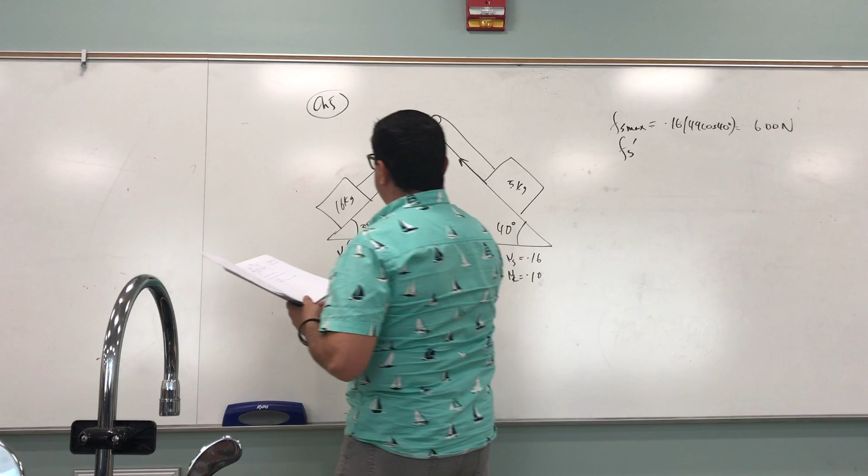And Fs prime max, these ones we call prime on this side. That's equal to 0.45 times the weight of that, we made it heavy, so 16 times 9.8, 156.8, cosine of 35. 57.8.

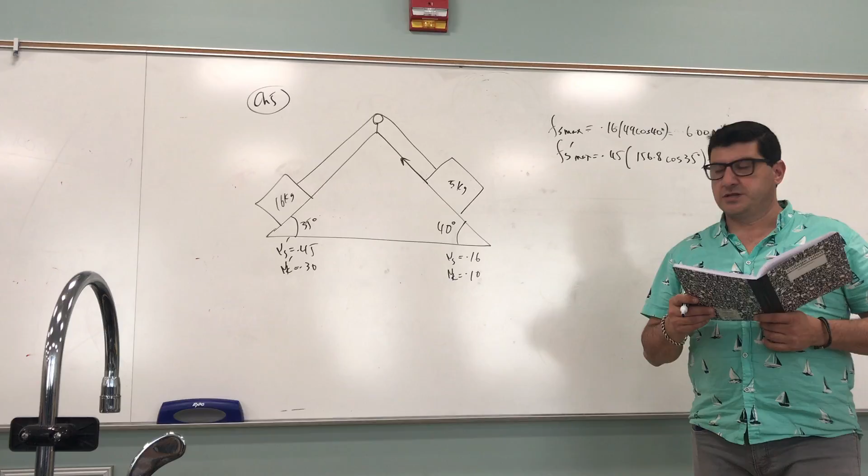I think at the end I said it wrong. I said the system will move. Right, we adjusted something because it wasn't moving and we redid it again. At first I had 6 kilograms, then changed it to 16, but it still doesn't move. I was wrong. I said it will move because the sum of these two forces is 63.8, right? On my notes, it said 58.45. No, that's the difference. I'm sorry. Yeah, sorry.

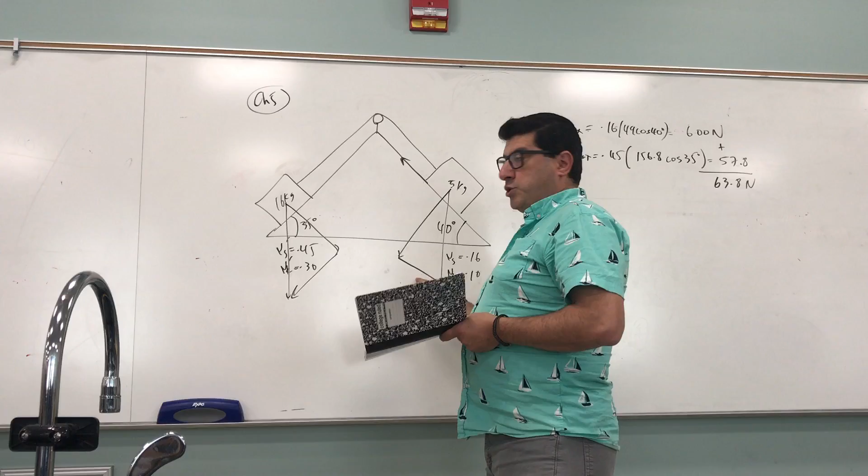So remember, you break these weights into their components, because they're competing against each other. So this guy is the downward component of the weight of this. That one is 49 sine of 40, which is 31.49. And then this one is 156.8 sine of 35.

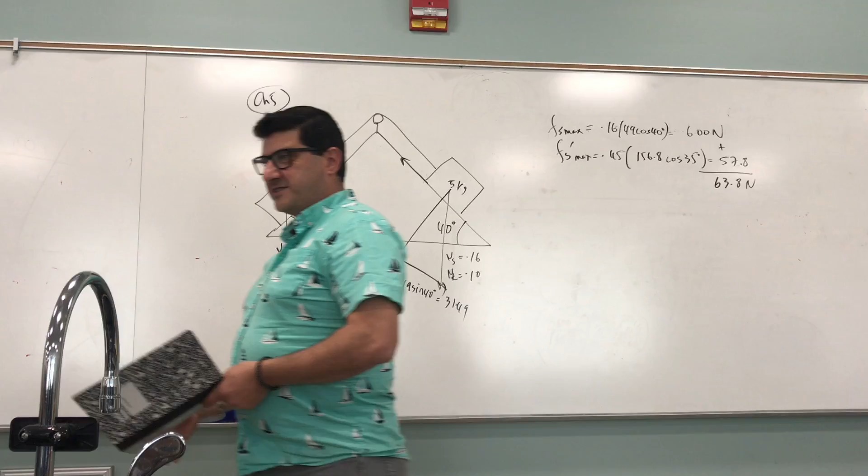Now in your notes, who gave me this? It's not complete. You're not showing how you got the 89 and the 31. No good. So that's a half. 1.5 out of 6. I have notes, but not complete. So you got to show how you're getting the downward component of the weight of each.

This one comes out to be what? 89.94. Okay, now if I subtract that, 89.94 minus 31.49, see, it still will not move. This becomes 58.

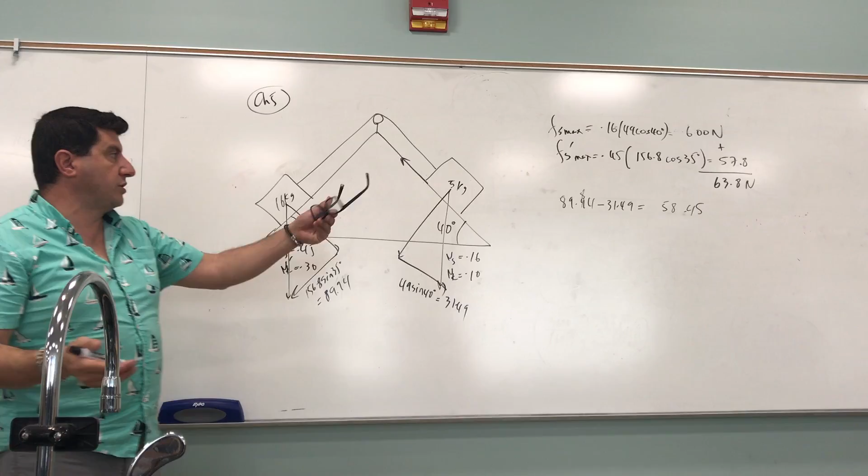So what's happening here is that the reason the system can move, if it ever will, is that their weights are fighting against each other. If there's no friction, of course the system will move. We don't even have to do all of this. But friction here will oppose that motion, and friction here will oppose it. Oh, this friction is downhill, right? It's going down. So this friction at maximum can be 6 newtons.

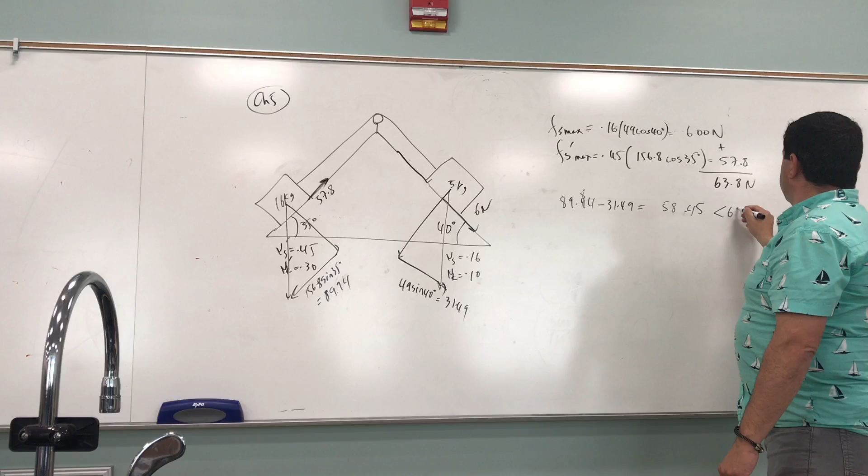And this friction can be 57.8. So together they can exert a total of 63 newtons. That's more than the difference of these two weights, right? 58 is less than 63. So the system doesn't move. I don't know if that's a happy face or a sad face.

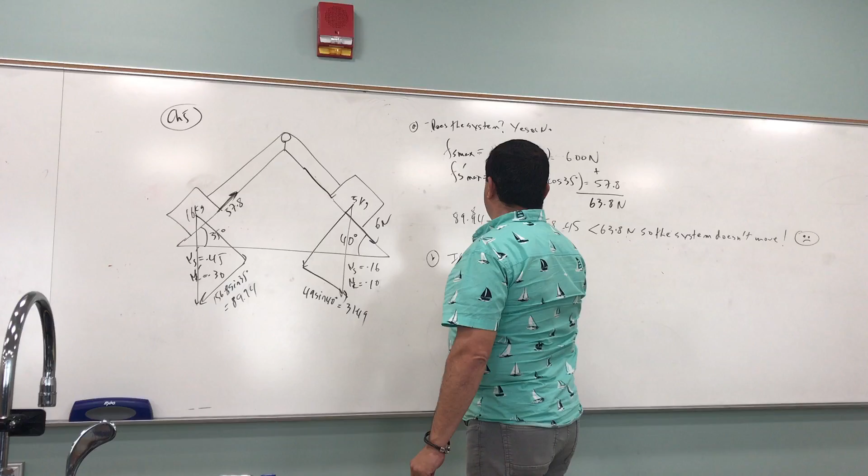Okay, so if it doesn't move, can we find out what the friction force on each one is individually? So the question can say, A, does the system move? Yes or no? And once you determine that, B can say, if no, what is the friction force on each block? And if yes, what is the acceleration of the system?

Right? So in our case, we know it's a no. So the answer is a no, right? So what is the friction force on each block? Set up the equation. Huh? It'd just be the force going down each. In other words, the friction here, this one's 6 newtons, it seems like that one probably reaches its max earlier than this guy does, right?

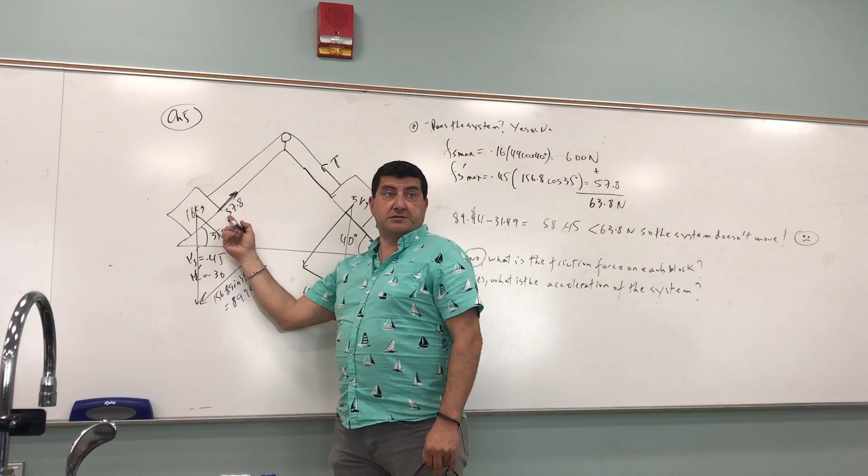So, in other words, just simply by equations, you have the tension in the string. So you have T is equal to 6 plus this guy, right? So let's assume this one reaches its maximum, this friction. Assume it. I believe it will, because 6 newtons, it will reach it. This one will reach its maximum before this one ever does, right? So then what's going to happen is T plus 6 is equal to what?

Sorry, it's not T plus 6. It's T is equal to what? 6 plus. So these kind of problems are really good. It's all visual, you see. You can see one force is up, so that one has to equal this plus this. Both of these are trying to drag the system down the incline, right? So it's 6 plus 31.49. And then T is equal to 37.49 newtons.

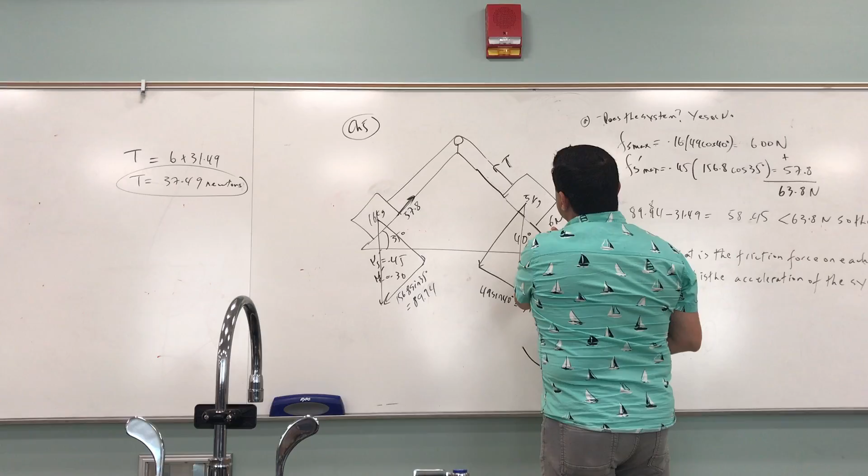So in other words, as soon as you put this block here and you connect it with a string, this block wants to go downhill. This guy is trying to make this one go up, and then the friction goes up to 6 and says, I give up already. I can't be larger than 6, right? And then the friction here says, I'll come and help you, because this friction is weak, you see? So now what's this friction gonna equal? Fs prime, we can call it. It's not gonna equal its max, because it doesn't need to.

So you say T plus Fs prime is equal to down, right? So this plus this equals this. Very visual, just look at it visually. T plus this equals 89.74. So the T that you got, you put it here. Then you subtract this minus this, right? And if that's less than its maximum, which is 57, that's another way of showing that the system doesn't move, right? So 37 you subtract from this.

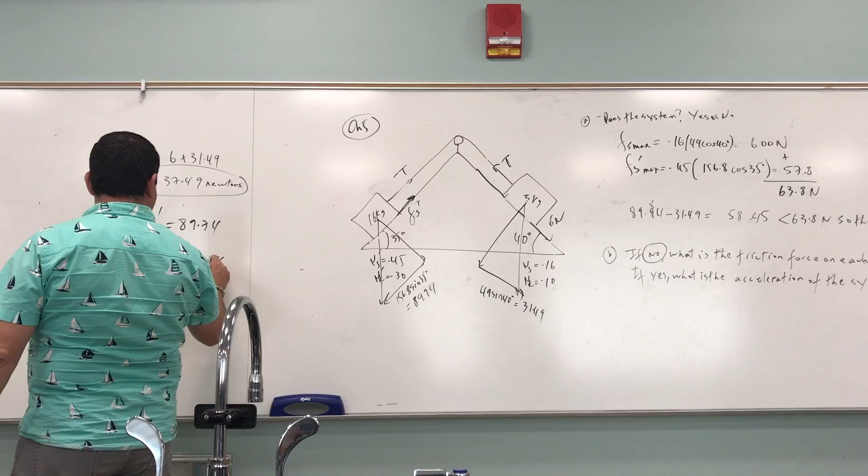Where do you get the 89.7? The 89, this guy, the weight of this. You're gonna have 94? 89 point, what was it? 94? Yeah, I did that on purpose. My handwriting wasn't good, and so I read my handwriting wrong. Do you guys ever do that? Exactly. I'm just trying to model what you guys do. It's always on purpose.

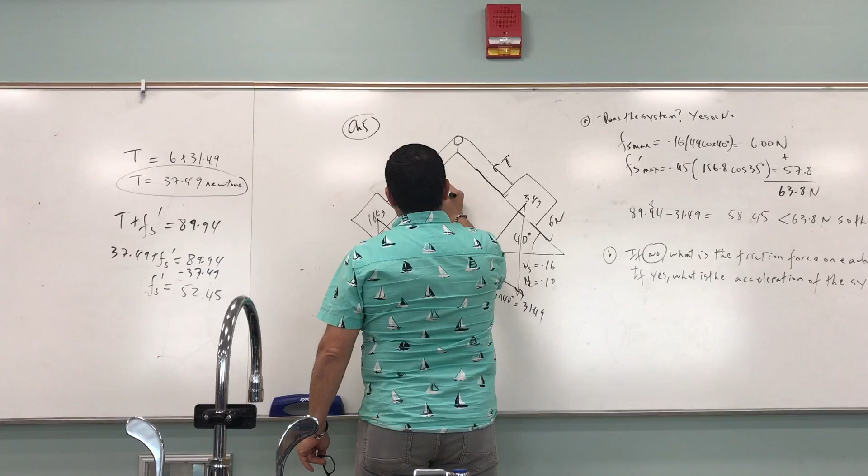Okay, so you have 15, 8, 4, 2, is that 2? Yes, and then 5. Okay, is that good? So in other words, the friction here only has to equal 52 newtons in order to prevent this guy from moving and also help the other one not to move, right? So can it be 52? Yeah, because we found out that it can be as much as 57. So it can be 52. This only tells you the maximum possible that static friction can be. So now this proves to you that the system doesn't move for sure.

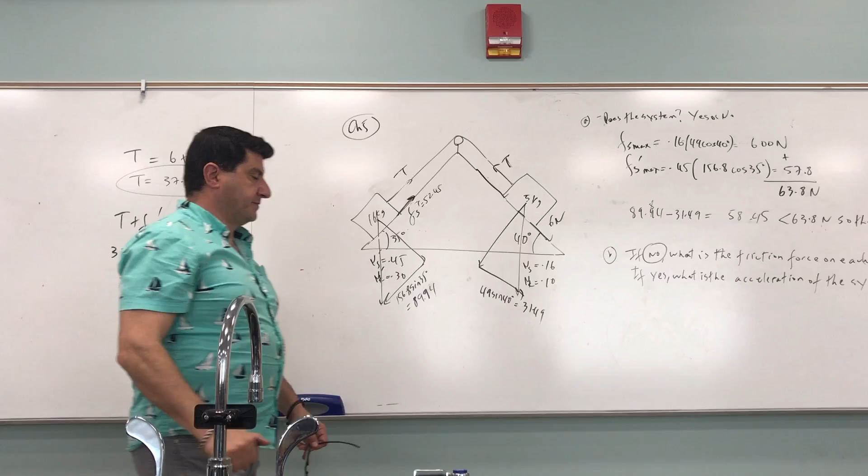Fs prime is 52, Fs is 6, and the tension, in case the problem asks about the tension, is 37. Question. Yes. So if you were to use big M and little m, could you find an inequality of the masses for when the system would move or not? A general inequality? Yeah, of course. The big M and little m? Yeah. Yep. See, this one not only is light, but it also has very little friction.

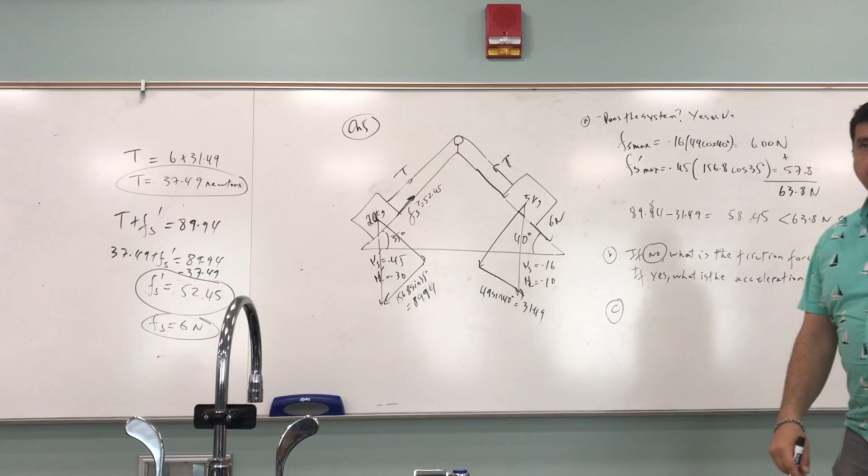Okay. Now part C. What if I add 4 more kilograms here on the left side? You think the system is going to move? Maybe. I think so, yeah, because this barely moved. Yeah, I'm pretty sure it will move. So if the 16 kilogram changes to 20 kilogram, what is the acceleration of the system and the tension in the string? Okay? So now redo it. See if you can get it started. I made the 16 into 20.

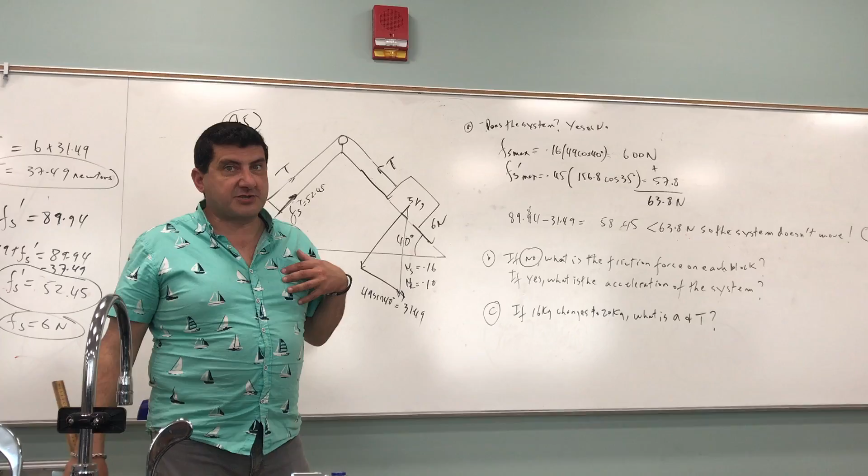Well, before finding out, before getting the A and the T, you have to first prove that the system is gonna move, right? I mean, just because I said so doesn't mean it will. So how would you check? You have to do exactly what we did all over again, right?

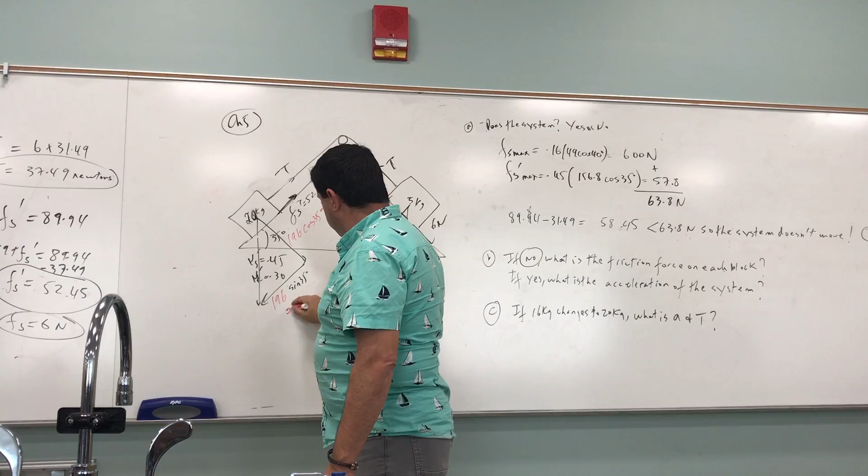So how would you check if the system does move? Well, recalculate the weight of this, right? 20 times 9.8, that's gonna be 196. And then this is gonna be 196 cosine 35. So redo this thing, right? Redo this thing. 196 sine 35, 196 cos 35, right?

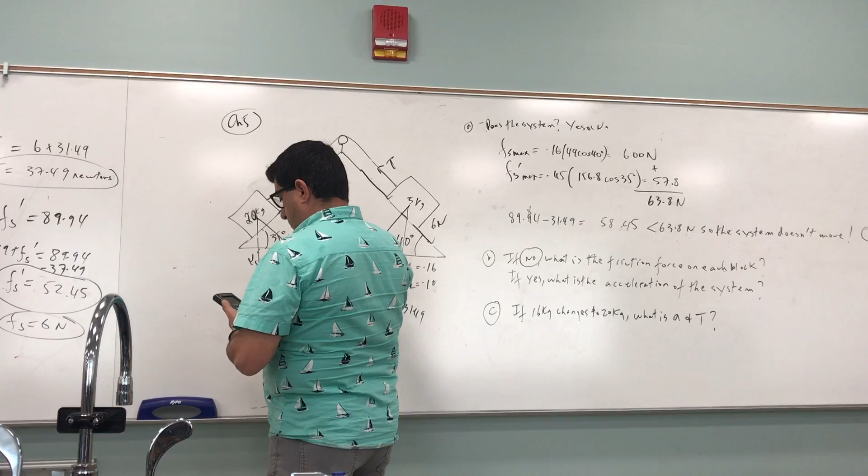So you do the 196 cos, 196 sine, then what do you do? You redo this guy, right? Fs max. This one stays the same, but this one changes to 196 cos. So you try to figure out what the maximum friction, static friction is, right? Under 20 kilograms. So 196. That's Fs max, not F prime.

Which one? Isn't that for the right side? Which one? This one? Yeah. 6 newtons? Yeah, that one doesn't change. Yeah, that's what I'm saying. But you have to figure this one out. That one out, yeah. Yeah, exactly. I thought you were doing the other one.

So this one is gonna be the 160, right? 0.55 times 0.45. So 72.25. So together 78.25. The two frictions together give you 78, right? Then you figure out this one is 112.42. 112.42 minus 31.49. So the difference of their weights.

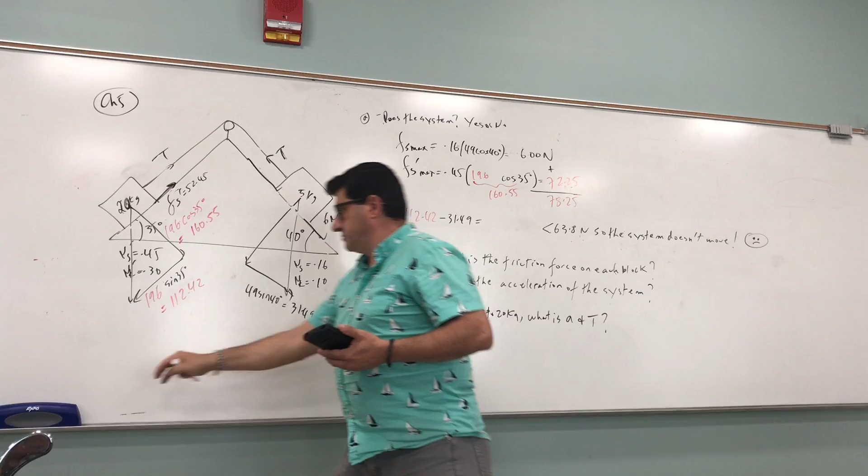Oh, barely. Huh? Right? So together, the two frictions can only exert 78 newtons of force, but the difference of their weights is 80. It will move. Right? So it's greater than 78.25. So the system moves. Yeah? You guys see the logic?

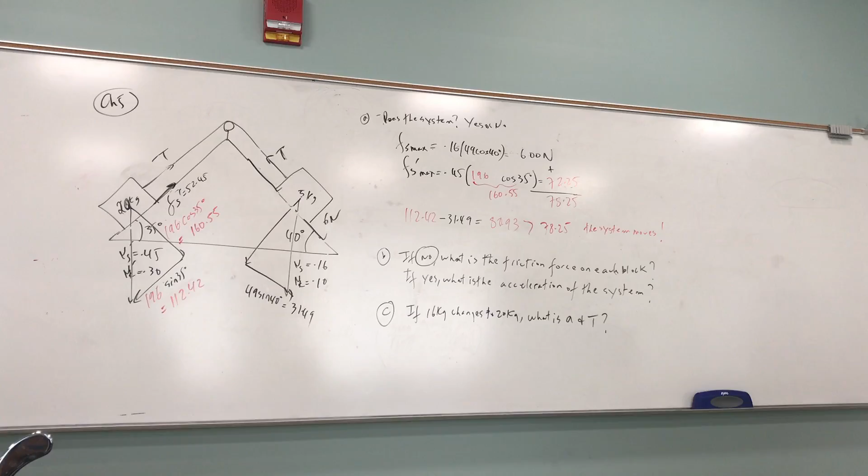If the two competing forces, you subtract, you get 80, but together the friction is 72, the maximum friction is 72, and then the maximum friction of this is 6. So together it can only give you 78 newtons of support. So system moves. See? So now if the system moves, what will happen? Which direction will it move? Well, then this guy will move down, this tension will be up, and then what's going to happen?

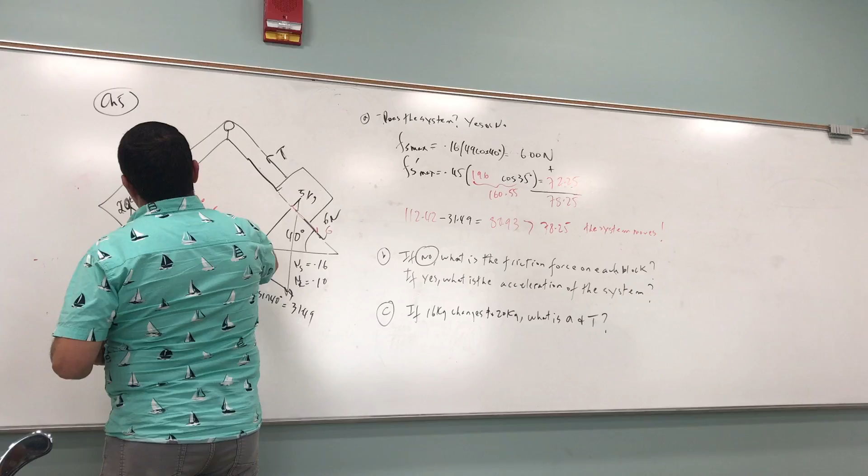The friction force reverts to kinetic friction, right? Once the system moves. So we change this to kinetic, which is mu k prime n prime. And then this friction also changes to kinetic, right? Mu k n. Okay? So now what happens? This guy accelerates down the incline, this guy accelerates up the incline. So now it's just going to be visual. Look at it visually.

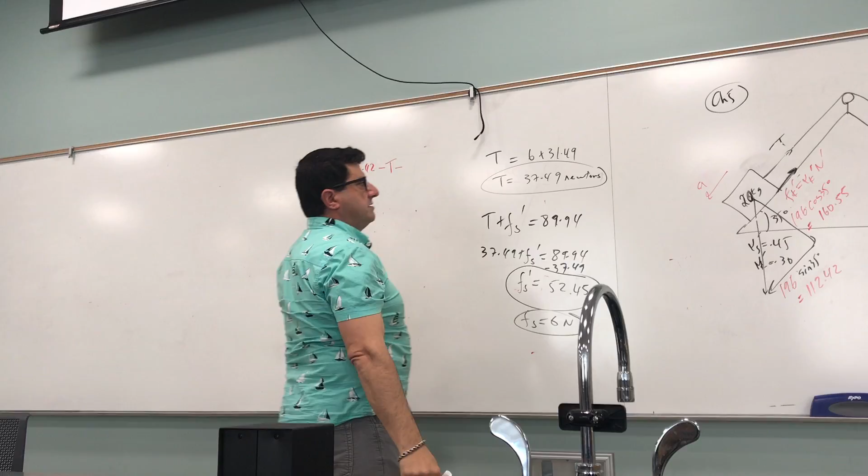112.42 minus what? Minus the tension, minus the friction, but kinetic friction now. So what is that? 0.3, right? 0.3 times the normal force, which is what? The normal force is going to be 160.55, right? Is equal to the mass of the block times its acceleration. So the downward force of the weight minus the tension minus the kinetic friction is equal to mass times acceleration, right?

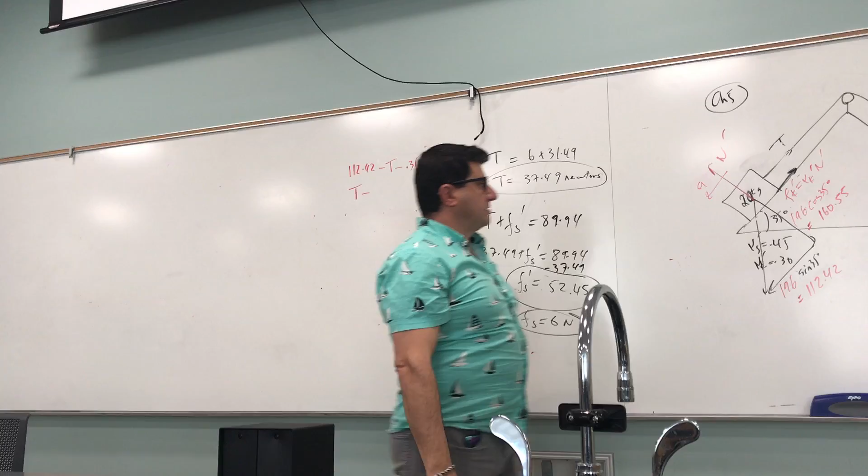And then for this one now, the tension wins because the net acceleration is up. So now you do T minus the downward weight, 31.49, minus the kinetic friction, which is mu k n. So the mu k is 0.10. Times the n of that is what? The n of that was 49 cos 40, right? 49 cos 40. Which one was what equal to? Well, let's just write it 49 cos 40. That's equal to what? 5a.

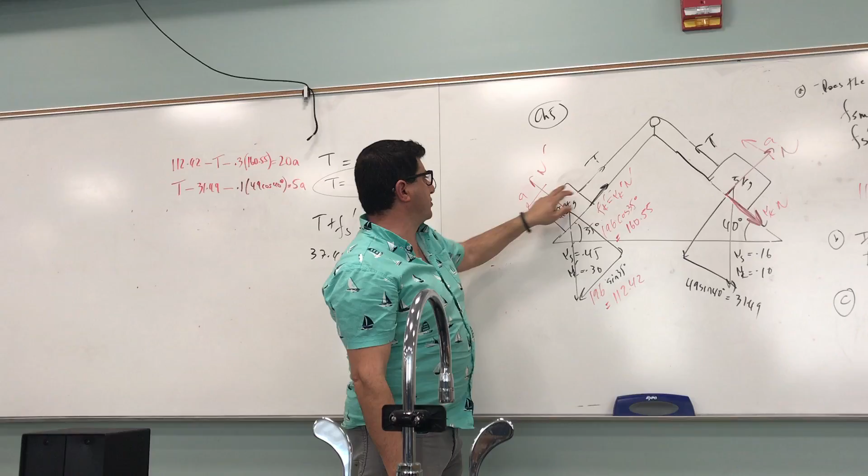So it's always the winning force minus the two losing forces. So this force is winning, and these two forces are competing against. So the winning force minus the two losing forces equals the mass times acceleration. Okay, so then you can add these two equations. When you add the left, make sure to add the right. Right, so then you have here 112.42. Negative T plus T cancels, and then you add the right side is 25a.

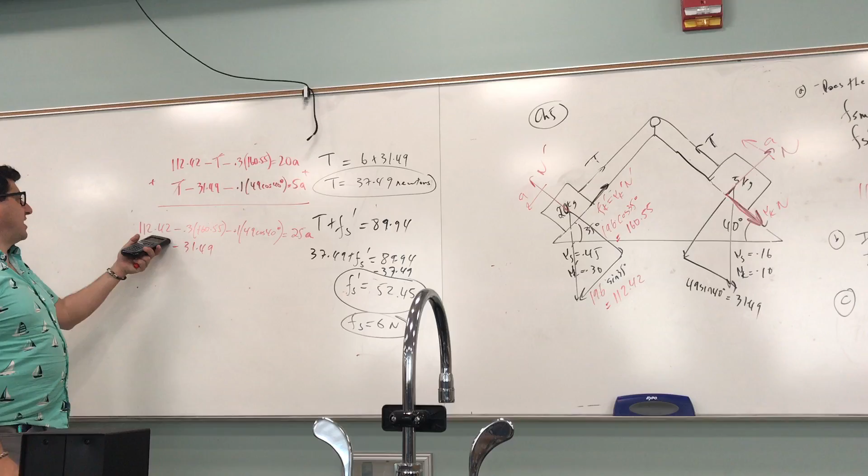Not the 31. Which one? The 31. Yeah, like where you added the equations, I mean. That's 31. Oh, that's the downward component of the weight. Did I forget that? On the bottom. Negative 31. Oh, you have three things to subtract, right? Again, I did it on purpose, because often students will forget that too. Right? Can't forget that. Now, the two competing forces, the weights, and then the two frictions.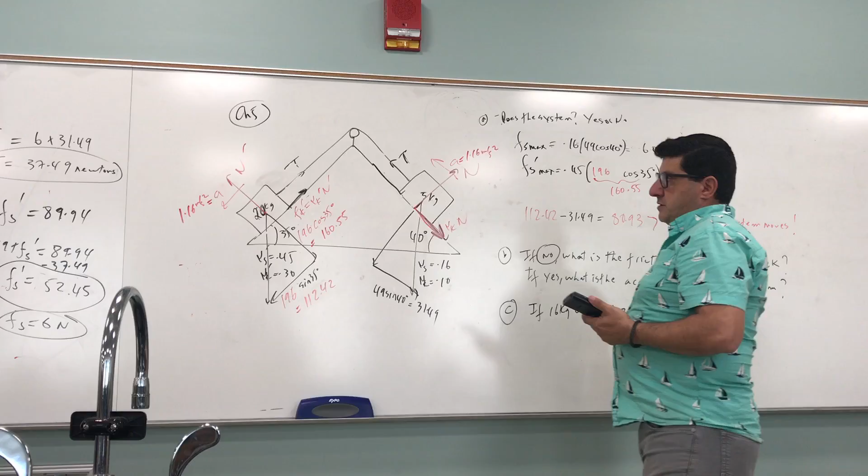So that means they both accelerate at that rate of 1.16 meters per second squared. And then once you get that, you can put it back into here to calculate the tension, right? Into either of these two equations. I can put it here, then add everything here to that side, and then calculate for the tension.

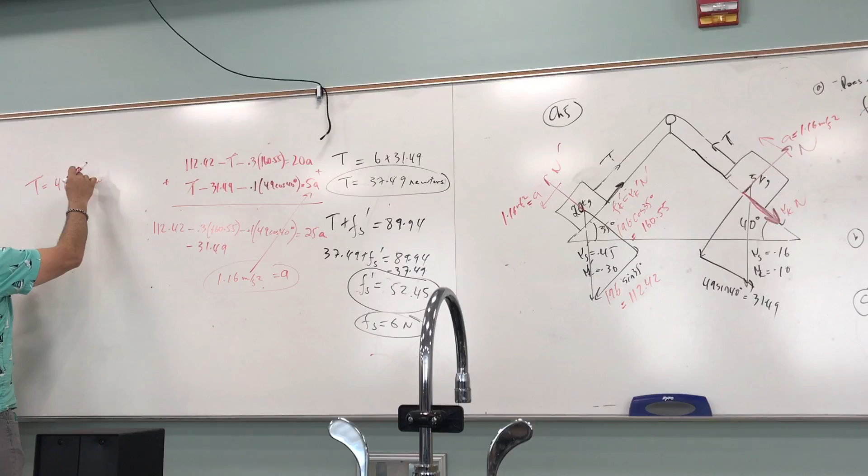What was the tension in the earlier case? 37 newtons, right? So when we added more weight, went from 16 to 20, the tension in the string should get tighter, right? Yeah, that makes sense. When it was 16 kilograms, it was 37 newtons of tension.

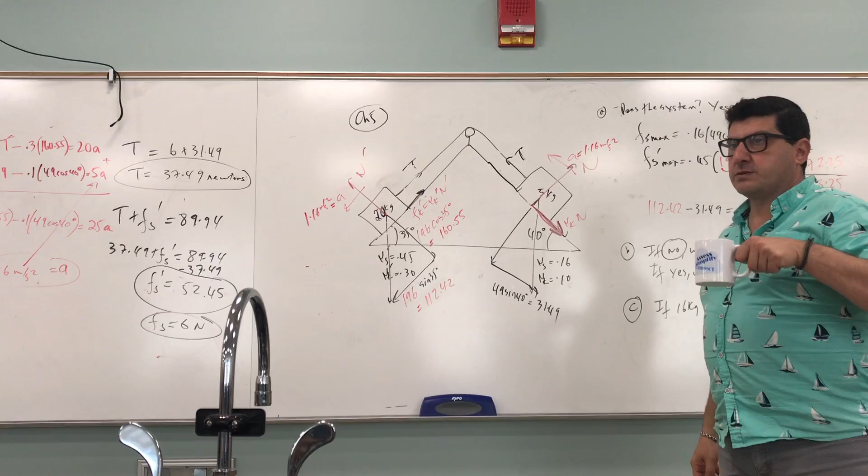Tension is sort of the measure of the stretching of the string, how much you're stretching it, right? Okay, look at that again, review that. I'll give you a minute or so. Review it, make sure you can understand.

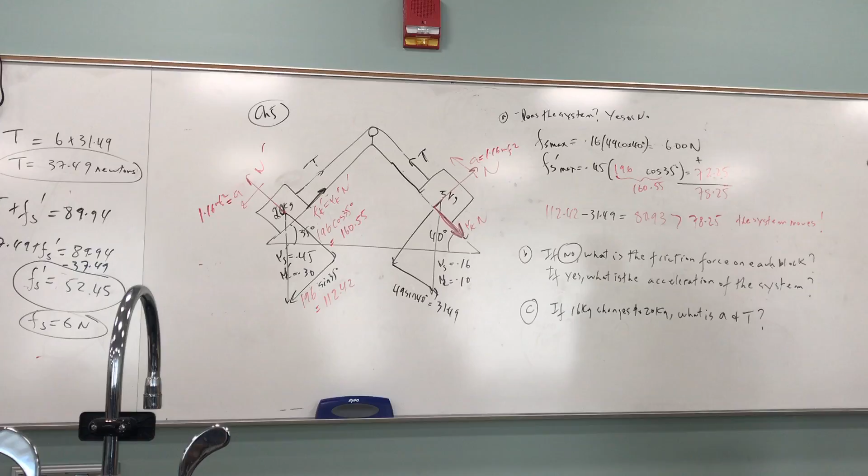You're understanding? Look at that, look at everything.

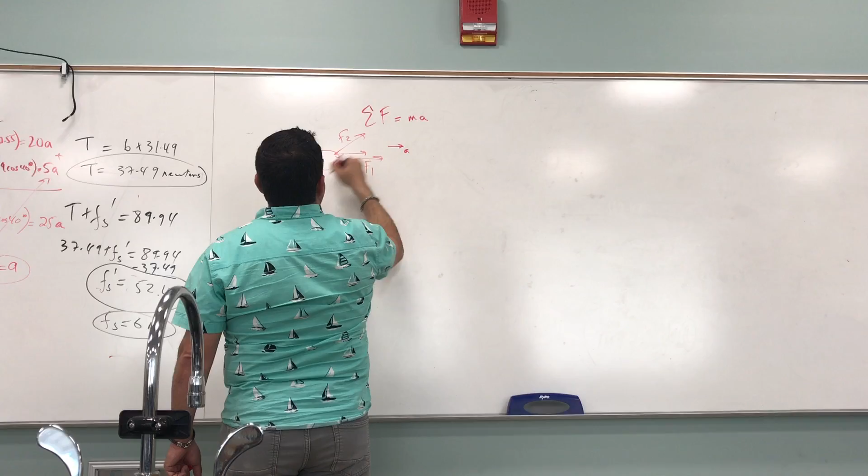Let's say we know that it's accelerating that way. Then we do this force plus that force, component of that force, minus this force. So F1 plus F2 cos theta minus F3 is equal to MA. Winning forces minus losing forces. I get the math on it.

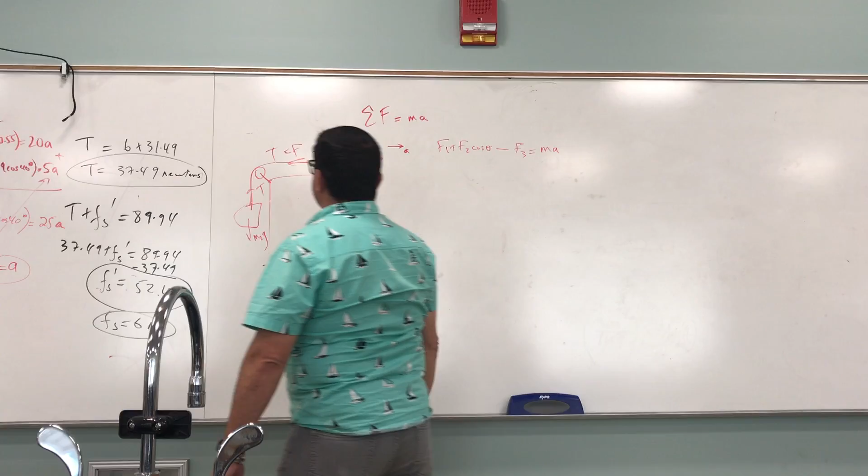And then if there's a string here with a pulley, right? Then what happens? F3 becomes the tension in the string. And then you have tension. Then you have the weight of this guy. So if this is accelerating this way, these two are beating the tension, right? And let's call this M1A.

And then which direction is this accelerating? If that's accelerating to the right, this guy's accelerating up, right? So then tension is beating this guy. So T minus M2G is M2A. Then you add these two. There's your possible test question.

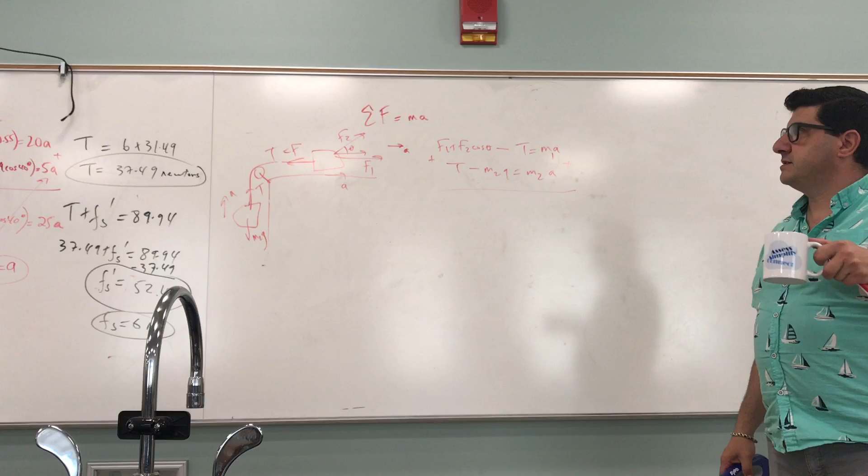I'm just used to working out on force tables, not like with the shorthand. I've never seen it written that way, almost like it's a variable. I mean, I get it, it's just when I was writing it down right now, it confused me for a second. I was like, wait, what is that? Almost as if A is a variable. Yeah, it is, it's an unknown variable. I'm just used to seeing it in a force table, separated, not just in a straight equation like this. But I get it though.

Okay, how about this one?

This is kind of like that block problem we had before, with the block and a pulley and another block, but one is just hanging there, freely hanging. I say, wait a minute, if it's freely hanging, isn't it gonna fall, right?

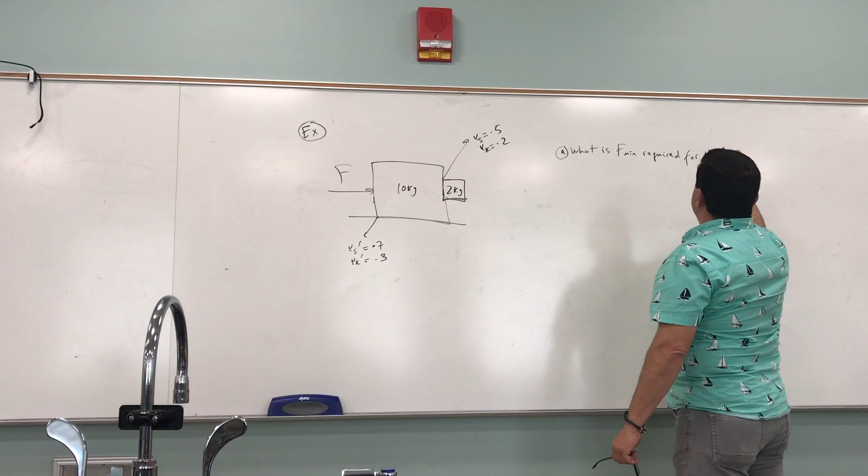Yeah, it will fall, but I'm gonna ask a question. What is F minimum required to make it not fall, for the 2 kilogram block? What is the F minimum? The minimum force required that you should push this one with, so that the 2 kilogram block stays stationary.

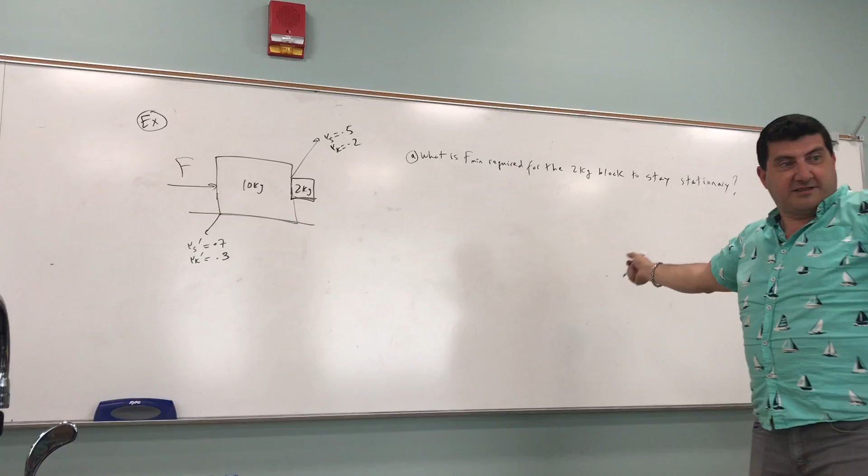Can you do that? Can you possibly push the 10 kilogram with enough force? And the answer is yes. It's almost like Spider-Man in the movie where he's in front of the train and the train is pushing him, but he had the webs, threw them at the buildings, and stopped the train, right? This is Spider-Man, which one was that? The second one, with the spider webs and buildings. Right, he stopped it before it went over the track.

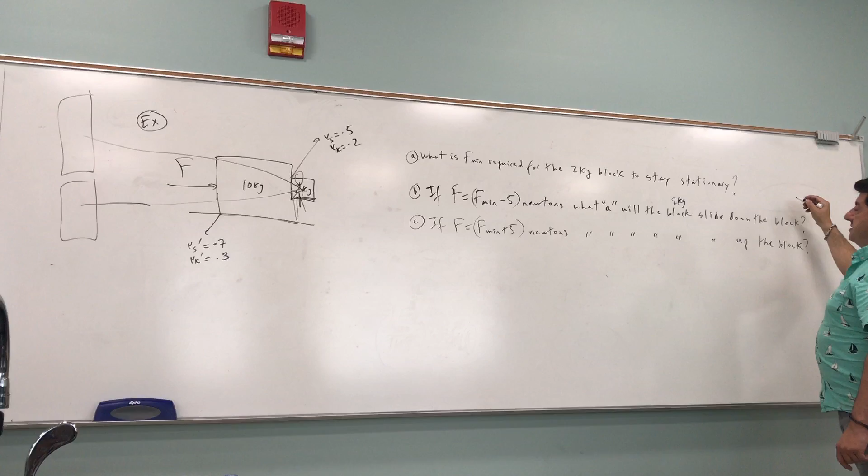So if F equals 5 newtons less, if you exert 5 newtons less force than that, what acceleration will the block slide down the block? That would be the 2 kilogram block sliding down the 10 kilogram block. Okay? And then the same way for the other one. So how do we find this minimum force required?

So, of course, I have to exert enough force to beat the static friction, right? So it has to be moving. That means we don't even need to know the static coefficient of friction. It's just extra information. So this guy is gonna be F, then you're gonna have mu K prime N prime, then you're gonna have N prime, then you're gonna have the weight, which is 10 times 9.8, which is 98, right? Then you're gonna have here the 2 kilogram.

Now let's focus a little bit on the forces on the 2 kilogram. What's happening to the 2 kilogram? There's a force pushing that. Remember the internal force between the blocks? We called it P before, for the other problem. We'll call it P again now. Then there is a friction force up, right? Preventing it from sliding down. So what's the friction force?

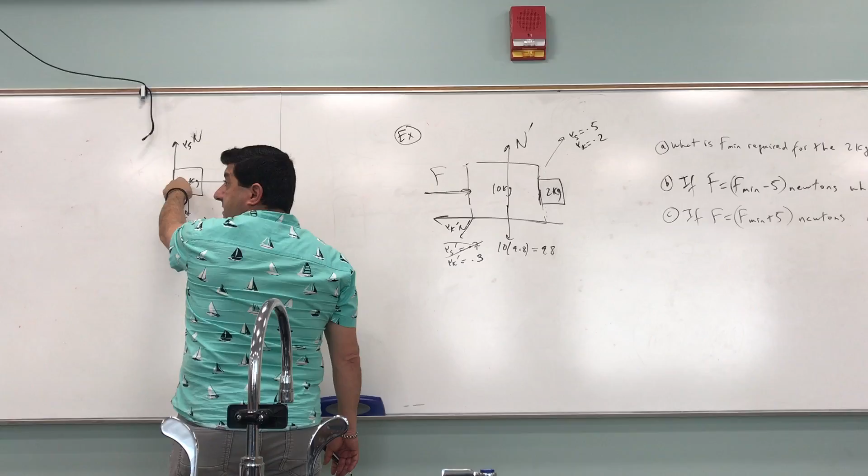No, that's it, right? Doesn't it exert a force on the... Yeah, so now we need to go back. So now we need to say, okay, if those are all the forces on the 2 kilogram, does this have any Newton's third law action-reaction? What are the forces on the 10 kilogram due to this? Well, this guy is pushing this one this way, and so this guy has to push this guy back with N. Always, every force has to have a reaction. So there's an N here.

Then there's a mu K prime N prime, which is this of N prime. But then there's another one that's kind of hard to catch. The friction force on this guy due to the 10 kilogram, right? So this guy is exerting a force on this guy this way, mu S N. Therefore, this guy has to exert a force on this guy this way. That's easy to miss. So there's an action-reaction pair.

Friction also comes in as a pair. If this one supports this one by pushing it up, this one supports this one by pushing it down, right? So there's a force here on this guy, which is down, which is mu, it's just the same thing as this guy, mu s n. Is that only present for static friction or? No, kinetic friction too. Newton's third law, always, anything. N, mu s n, mu k n. So would there be a mu k n on the floor, but we don't consider it to this one? Yeah, if it's sliding, we're gonna have to do that, yeah.

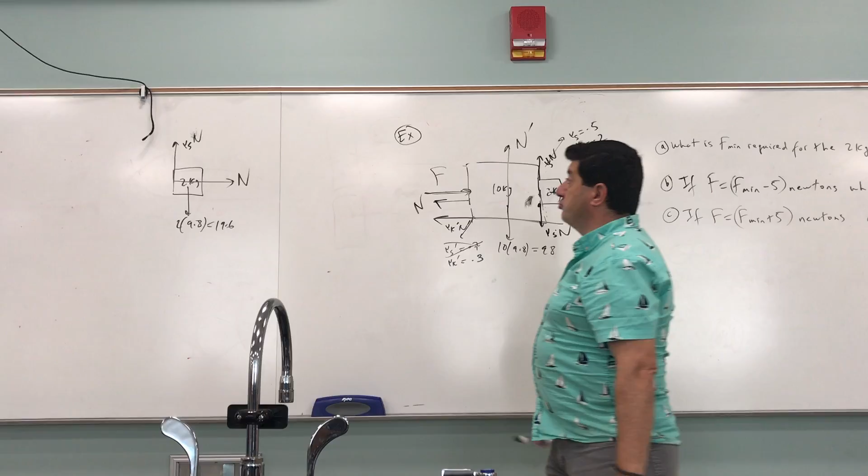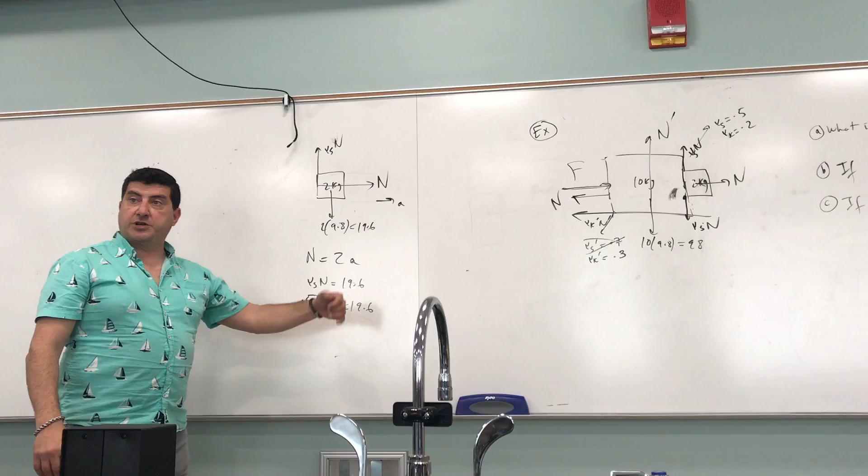So now, let's do the forces on this guy. We know it's gonna accelerate to the right, right? So n is equal to 2a. The acceleration is this way. And then mu s n has to equal 19.6, right? I think from there we can already calculate it, and mu s we already know is a half, right? So we could say here 0.5 times 2a is equal to 19.6. So that means the acceleration is 19.6. That means I have to exert such a strong force on this system so that the whole system accelerates to the right with an acceleration of 19.6 meters per second squared. That's a very fast acceleration.

And if A is 19.6, that means the normal force is 2A, so it has to be 39.2 newtons. So then the normal force on this guy is 39.2 newtons, and the acceleration of this guy is 19.6 meters per second squared.

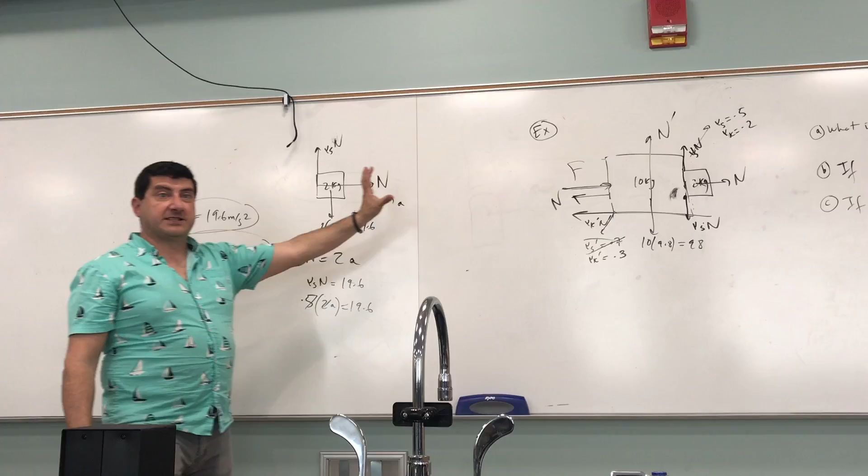Now I can go and analyze what's happening to the 10 kilogram block. You got the force F pushing this way, the normal force pushing this way, that means the 2 kilogram pushing back. Then you got N prime, the ground, then you got the friction force mu K prime N prime, and what else? You got its weight, which is 98 newtons. Then you got the friction force mu s n, pushing down.

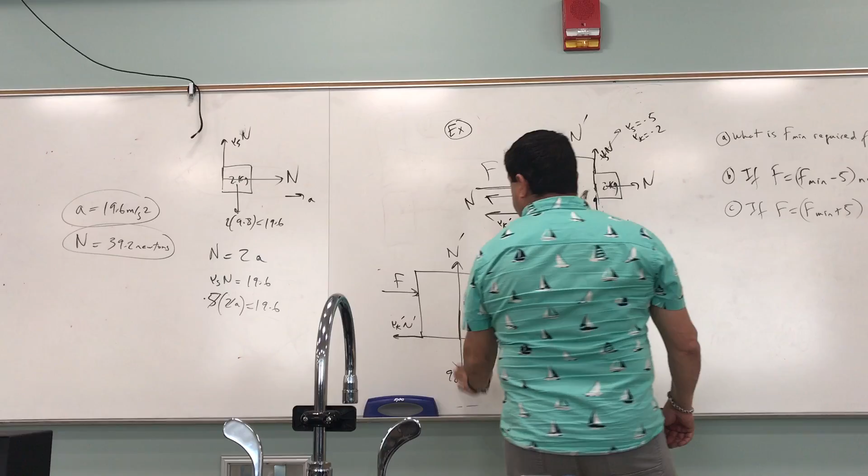Okay, so let's do the vertical forces. In the vertical direction there is no acceleration, right? So for this guy in the y direction, N prime must equal 98 plus this downward force, which is mu s n. So that's going to be what? Mu s n, well we already know mu s n is 19.6, so we can just use that. 19.6.

Then what's happening in the horizontal direction? In the x direction you got F minus these two forces, minus this friction, minus the normal force, has to equal MA. So what are we solving for? The minimum force required.

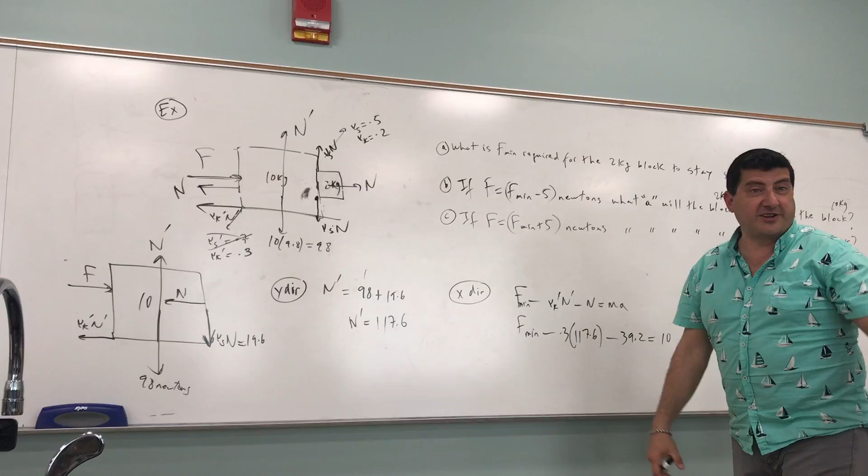F min. Okay, what's mu k prime N prime? Mu k prime was 0.3 between the table and the block, so 0.3. What's N prime? Well we solved N prime already, 117.6. What's N? N is the 39.2. And the mass of the block, 10 kilograms. What's the acceleration? Well they have to accelerate together as a system, so the acceleration is 19.6.

So that's the minimum force that you have to exert on the system. You have to overcome the friction force that's fighting you, and you have to overcome the force of the block in the front pushing back in order to make the system accelerate at that rate. 196 plus 39 plus that, what is that? 200 something? Yeah, that's 270.48 newtons.

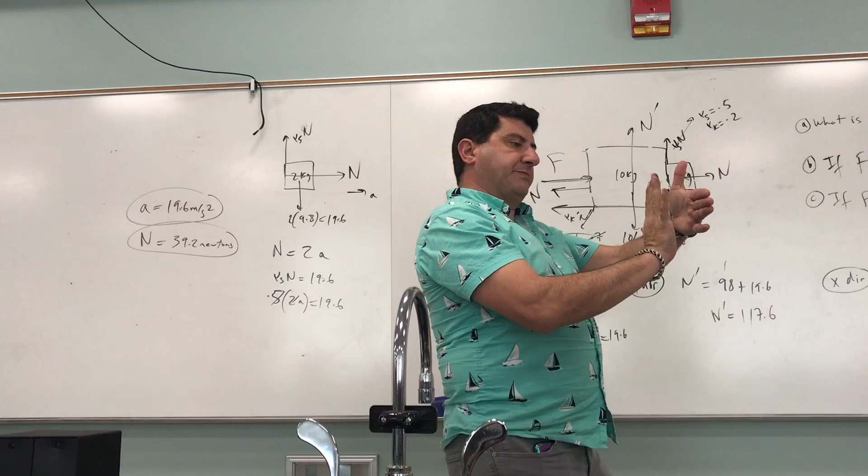How can we do an experiment to test this? Put the calculator here. I'm a little bit scared though, because there's a little bit of friction on the calculator, these rubber things that they put. So then go like this, and push the folder with enough force that the calculator stands in place. I don't want to ruin it. You see how it's kind of stood still? Maybe try something cheaper, like an eraser. You might be able to do it with an eraser. Yeah, but once I let go, it goes like that. You'd have to keep running with it, pushing. So what's happening is the force between them is creating a normal force, which is allowing the friction to keep it from falling. You see? By me pushing at it, it's causing the force between them to increase.

Okay, so now what if you exert 5 newtons less force? You know, it's good to keep the equations, and then you just have to sometimes change a couple things, and you don't have to redo everything.

So part B, if F equals 265... I have a question. Yeah, go ahead. I mean, I don't know if I can do F minimum minus the friction equal to the whole system, the mass of the whole system times A. Would that give you the same F minimum? Not only big M, but also include small m. The problem with trying to do the whole system is that you forget sometimes about these internal forces like the mu S N, and this guy pushing back on this guy. I would prefer to do this block by block.

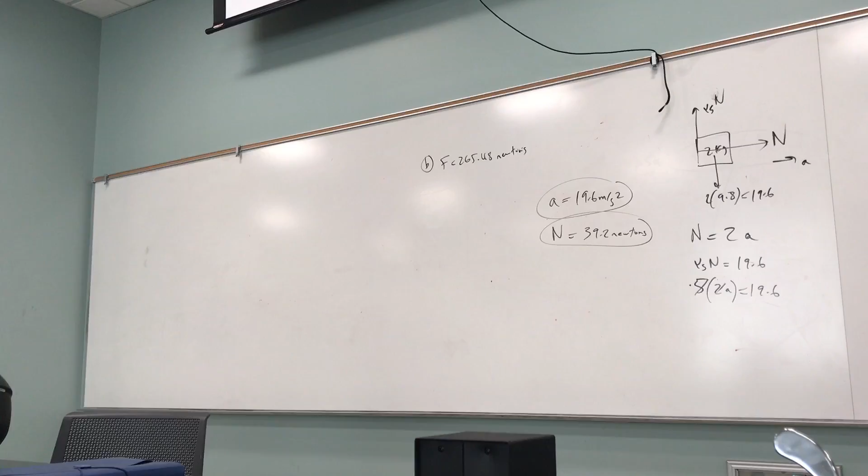Block, like two blocks. Yeah, because then I can see, okay, there's a friction on this guy which is holding it up. Then this guy exerts a force on this guy down, you know, when you try to do the system. Yeah, because I did that. That gives me the same answer because n is equal to small m times a. So small m times a plus big M times a. That's m plus M times a. So that's still the same.

Mu k prime m prime. But how would you have known n prime is 117? Because the weight of this is just 98. Oh, I mean m prime is the total mass. Yeah, but how would you have known that you can treat it as a total mass? Because it's attached to it. It's kind of like they are together. Okay, now you know that. But unless I told you about the internal forces, this guy holding this up, this guy pushing it down. I guess after you calculate the minimum needed, you could do it his way.

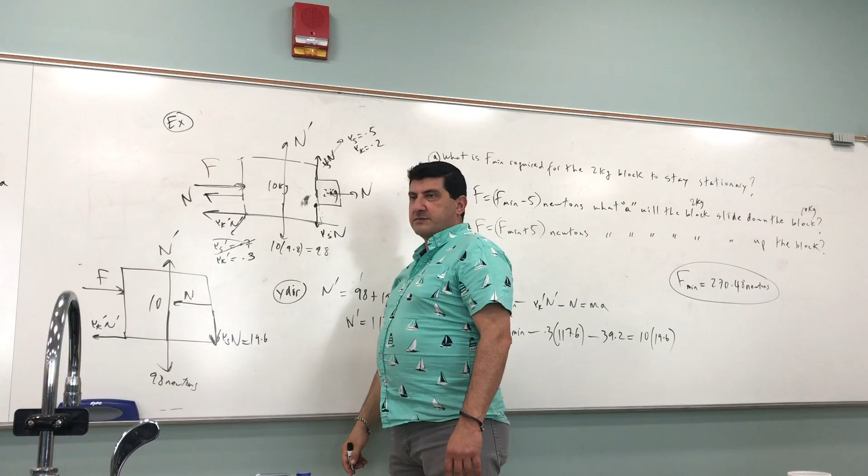Because if the question was asked a little differently, then that way it wouldn't work, right? Well, in part B, it might not work. See, if you're 5 newtons less, what's going to happen? Then this one will not apply enough force to this, right? This guy's going to slide down, and so this guy's going to revert to kinetic friction, mu k, and the weight of this guy is not going to change. So what's changing now? This is going to go mu k n. Now the friction here changes to mu k n.

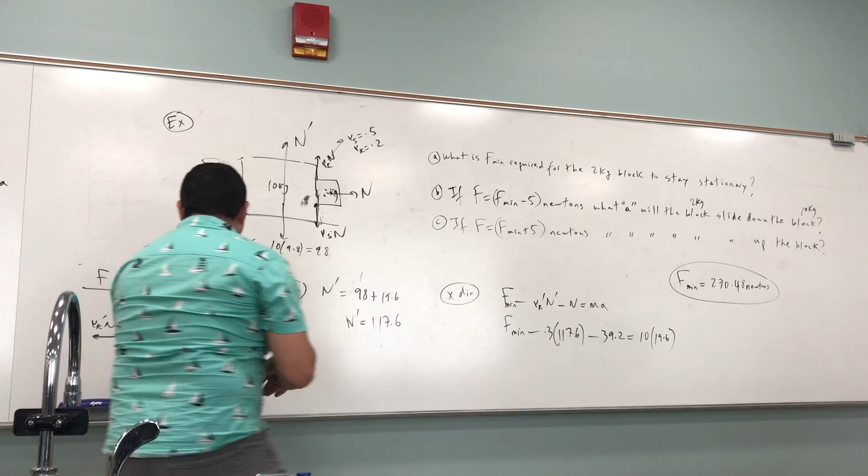Which means it no longer acts as if they're glued, right? In this case, part B. So in the earlier case, we just put it as P, and then we put the P variable in our sum of forces. But after we found that it was attached, we just assumed that P was just part of the whole thing, right? So now what else do we have? We have N, 19.6. Is N still equal to 2a? Yeah, that one's still the same. But no longer is this true, right? mu s N. So how do we change this part?

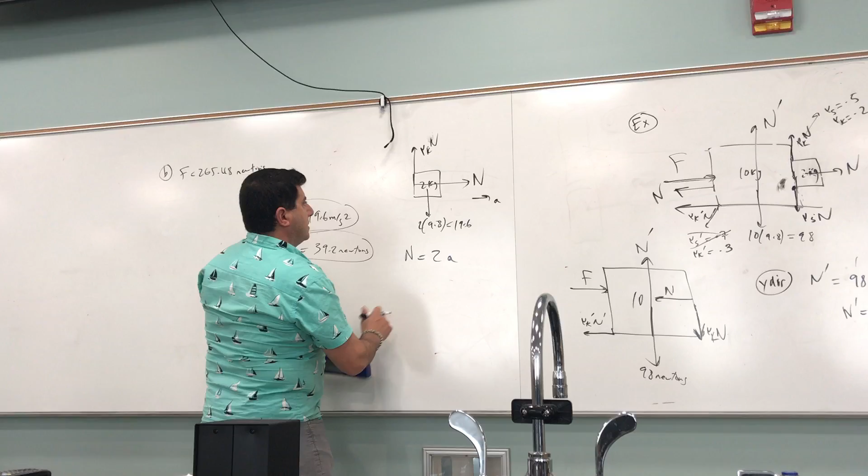So now it's going to be 19.6 minus mu k N is equal to its downward acceleration, right? What's mu k? 0.2 times N is equal to its downward acceleration, which we're going to have to call a prime, 2a prime. So it's accelerating this way, a prime, and it's also accelerating that way with a. And they're related because how much force you apply is how fast they'll fall. But here, this is not enough information to solve, like before it was.

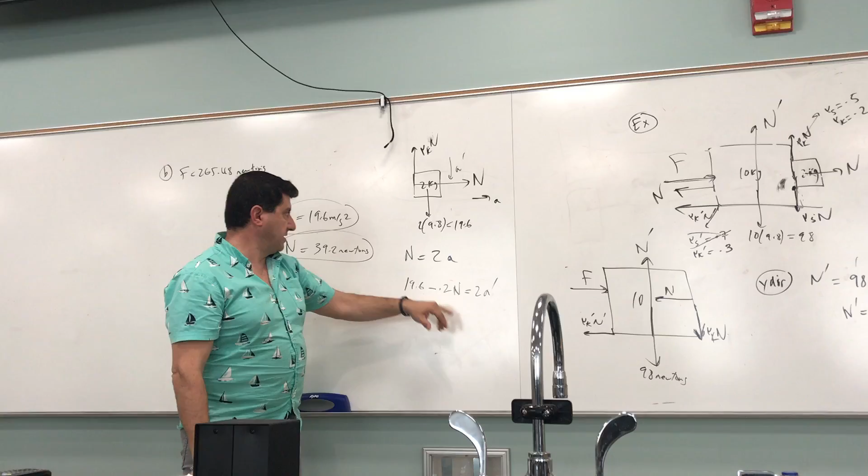Because how many unknowns do I have here? 1, 2, 3. So I can't solve anything here, right? I just have N is 2a, and weight minus the friction equals 2a prime, the downward acceleration. So none of this is true then. Then I've got to go to the other block and change some stuff. So now I'm going to change F here. I'm going to make it 265.

0.48. Is this still true? Mu k prime n prime, 0.3. That's the friction force, right? Right. How about n prime? 117? That's changing. Oh, that's also changing. Oh, dang it. So now we gotta go to the vertical direction, right? Right now. Now that one. Oh my gosh, everything is changing, right?

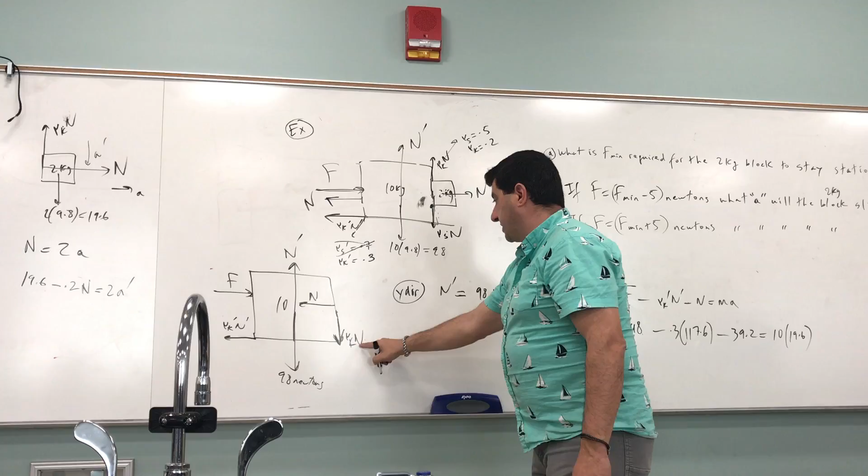So we have here n prime is equal to what? 98 plus this guy, mu k n, which is what? 0.2n, right? But we don't even know n is, right? Right. We don't know. My gosh, so we don't even know this, we don't even know that, so then we gotta take that and put it into here, right?

Let's see here. So minus 0.3. So n prime is the sum of these two, you got it? 98 plus 0.2n. How about this n? Well, that n we don't know either, right? Because we don't even know from here. So then we just leave it as n is equal to 2a.

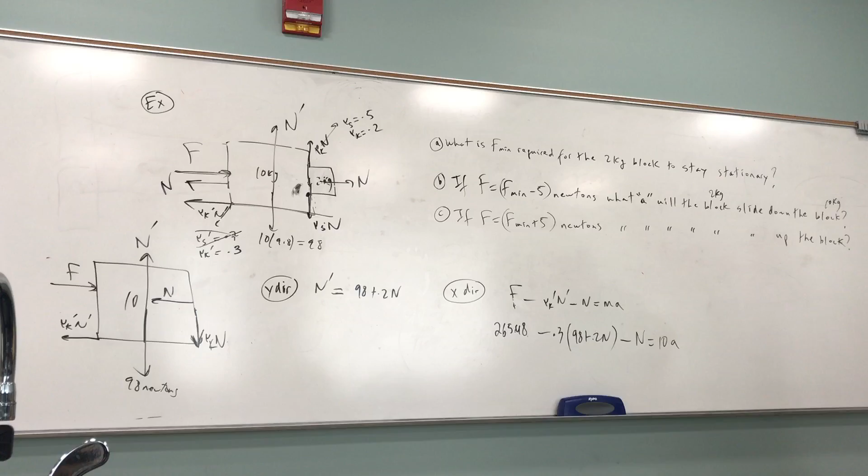Do we have enough equations to solve this? How many unknowns do we have? Our unknowns are a, a prime, and n, right? So, but I do have three equations, right? 1, 2, and here's my third equation. So I do have enough equations to solve three unknowns, right? So how do I solve it?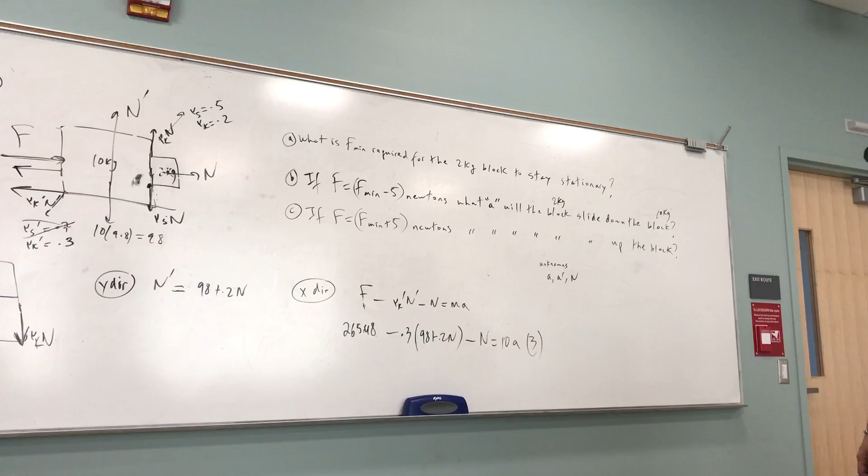Oh, you know what I could do? I could just put n is 2a into here and into here. And that's it. Then we can solve for a first, right? But it would be a function of the a's, right? Different a's. Yeah. Okay. So n is equal to 2a, minus 2a, and then distribute this in.

0.3 times 0.2 times 2, right? We have to multiply all this. 0.3 times 0.2 times 2. That's 0.12a. Right? And then you're gonna subtract these two. And then these two go over to the right side. Then you calculate the a.

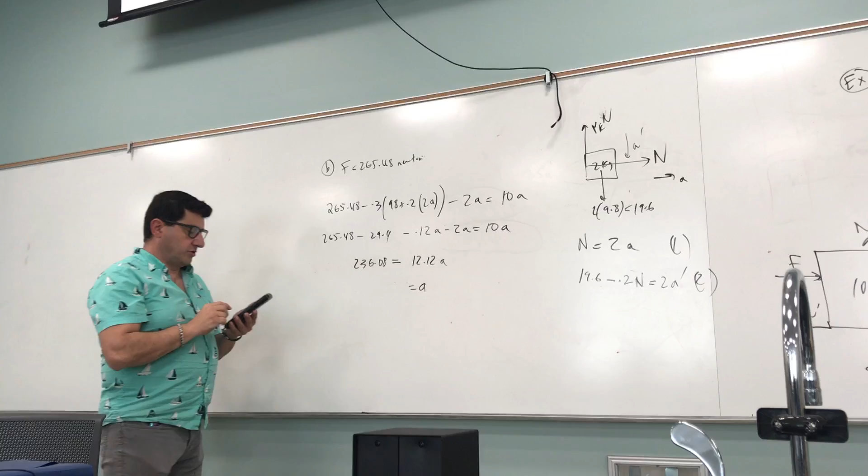You see? So remember what the acceleration was? The system was accelerating when the block was stationary. So now it's accelerating less. Well, that makes sense, right? What was the acceleration? 29, I think, right? So it's 19. Because I'm not exerting enough force. So only dropping the force down by 5 newtons caused the whole huge difference. It went from 29 to 19.

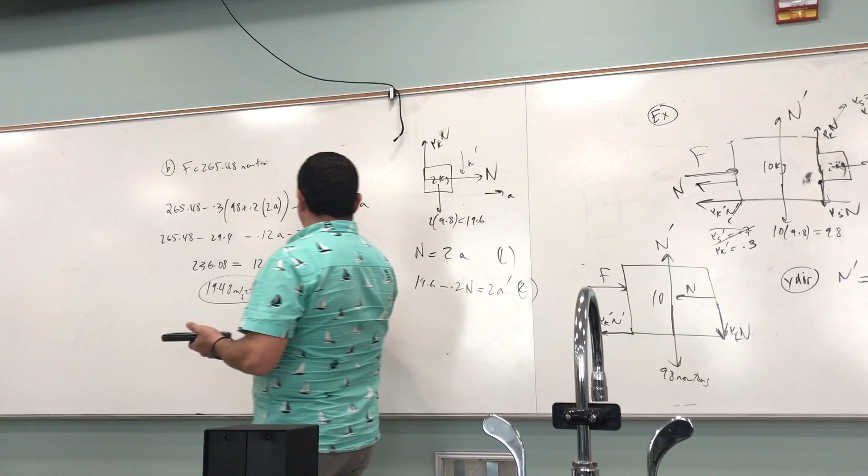Okay, once I get that, then I can get the n, of course. n is 2 times that. Right? And then I can put it here and I can get the a prime. That will tell me how fast the block is accelerating down. So 19.6. Oh, it's pretty fast. I'm surprised it came out that fast. 0.2.

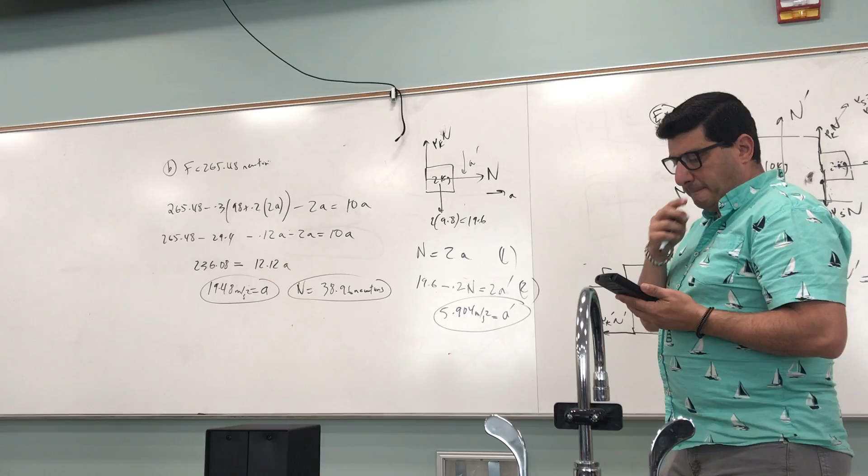Oh, well, because the kinetic coefficient of friction is much smaller than the static, so all of a sudden it dropped, right? So the acceleration downwards is very fast. It's going to hit the ground right away. Which is why it's hard for me to replicate that on the eraser, right? If I don't have the right force, it falls down.

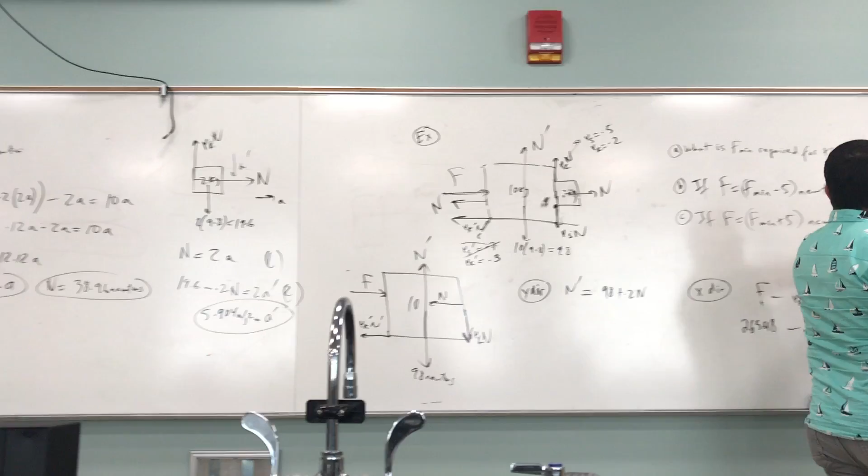Well, then part C says if you exert 5 newtons more force, what's going to happen? Logic will tell you, well, if you exert too much force, maybe the thing is going to accelerate up, or what? Because the problem is saying, what acceleration will the block slide up the block? Isn't this like one of those problems where friction can only resist motion and it can't cause motion? Yeah, I think we had that earlier with the other 2 block problem, right? Something like that.

It's gonna turn out that the teacher who's putting this on the test is trying to trick you. He's trying to make you say the acceleration of the block up the hill is something. It ends up that it doesn't accelerate up. You cannot create a situation where it accelerates up against gravity if you exert too much force. So the answer is the acceleration is still 0. It just stands still. That would trick us into trying to plug in the mu k instead of mu s and do the whole thing out.

So the answer is any force greater than 270 will keep the block stationary. It will not move.

Will keep block stationary. So there isn't an exact amount of force you need for it to keep it stationary. But then, playing the devil's advocate, you might say, well, why? Because if I exert 5 newtons more force, isn't that going to have a trickle-down effect?

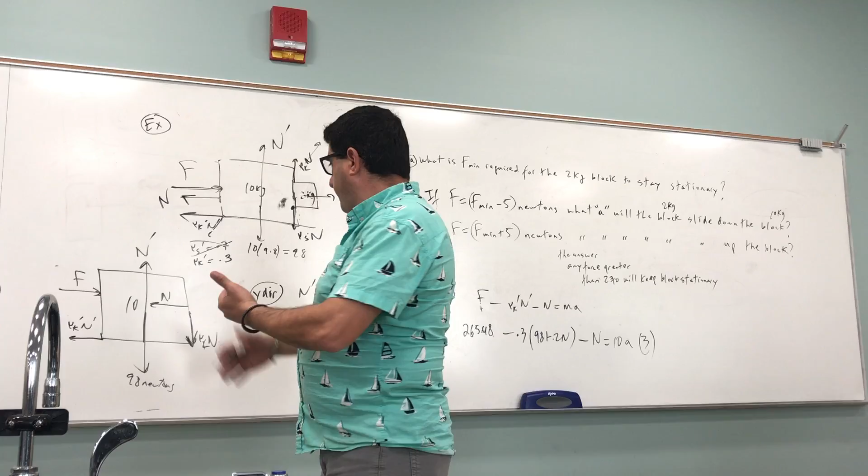If I exert a lot of force here, isn't that going to increase the N? It just increases the upper limit of the static friction, right? It doesn't really change. Yeah, I'm getting a smile because he's hit it bullseye. That's why he'll make a good tutor, because he also understands it very well.

Exactly. So increasing this increases the force that this guy pushes on this, which does increase the N, right? So this one increases, which means the maximum possible static friction increases, mu s N. So then someone could say, wow, if the maximum possible static friction increases, doesn't that make this guy accelerate up? And the answer is the static friction does not have to equal its maximum.

That only changes what? The way you worded it was perfect. Upper limit of the static. Yeah, it only changes the upper limit of the static. It's like you finding out today that you have a new job. You get a phone call and your employer says, I'm giving you a raise or a promotion. You have a new position in the company. You go, great. But the employer says, just because I'm paying you more, don't spend it all. Keep the same budget, save that, and use it for some good purpose later, right?

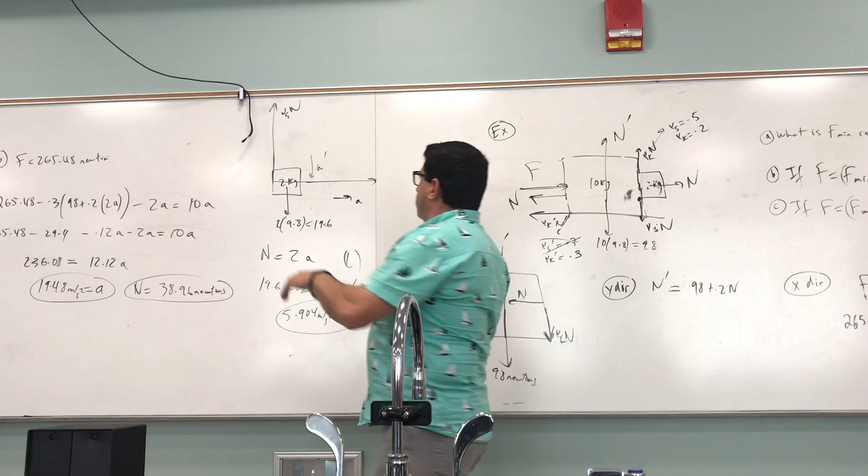So pushing harder and getting a larger maximum friction is the equivalent of getting a new job, right? But the friction says, no, I'm a thrifty spender. I'm not gonna equal the maximum. I'm only gonna equal whatever I need to equal in order to keep this block stationary. How much does it need to equal? 19.6. So the friction says, it's good that I'm earning more now, but I don't need to spend that. I can still drive my Toyota Prius. I don't need to buy a Ferrari.

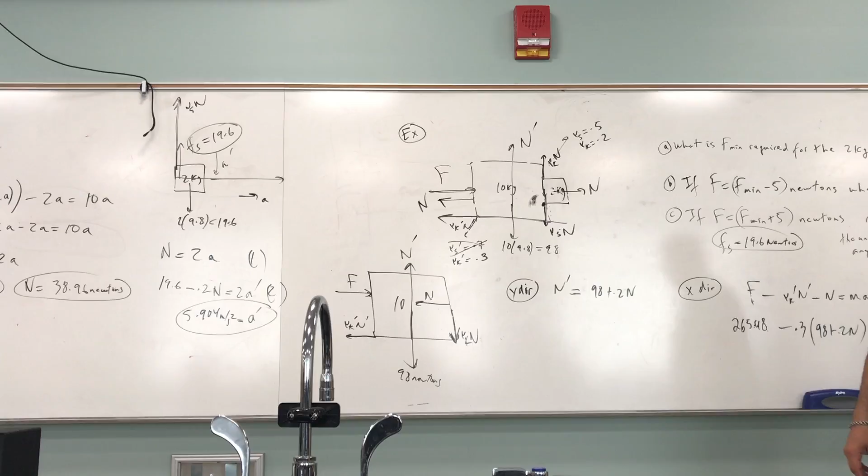Okay, so what's going to happen? The conclusion is that no matter how much you push, the friction force on the 2 kilogram block will still stay 19.6 newtons. The system will accelerate forward faster, that's true, but this guy will still stay stationary. So, if we were to change the reference point, since the force going this way is greater than the force of gravity, because you drew it like normal force. The force this way could keep getting bigger, but that has nothing to do with this vertical direction.

Right. But what I'm saying is, if we saw it from this perspective, that force is greater than the force of gravity, right? So no matter what the effect of gravity, that doesn't make me slide sideways if the frictional force doesn't allow me to. Yeah, exactly. It's a lot easier to understand, you know what I'm saying? Just because I'm being forced upward doesn't mean I'm going to slide sideways. Yes, exactly. So the object stays stationary.

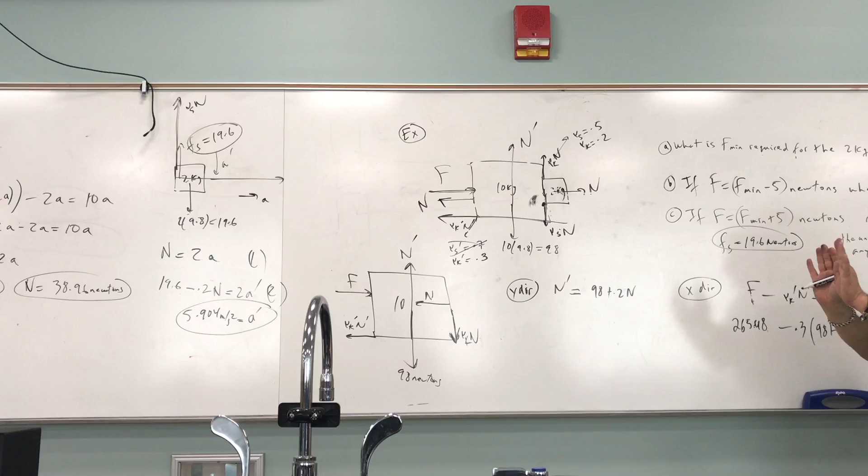This problem is a good teacher. It teaches us this big concept that static friction doesn't have to equal its max. It only has to equal what it needs to equal, right? But in the first case, what is the minimum force required? In that case, it does need to equal its max because you're exerting barely enough force to make it stationary. So at that point, the friction force has to equal its max. But if you exert less force than that, then we know it slides. Then it reverts to kinetic friction. You see?

Okay, now let's apply all of these things we're learning, Newton's laws and acceleration, to chapter 6 problems, which is circular motion, dynamics of circular motion.